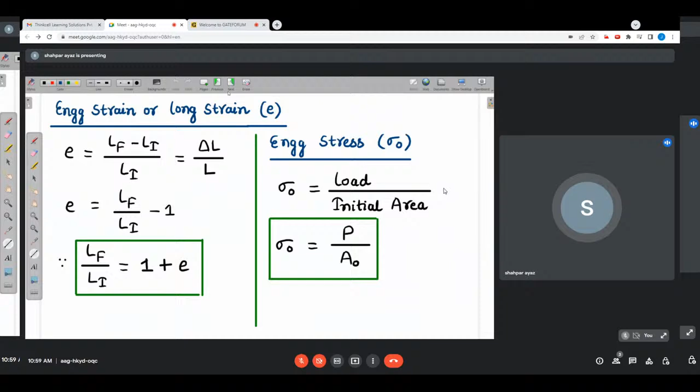So if the L final by L initial is 1 plus E, we can also write it as A initial by A final, or D initial by D final, like this: L final by L initial. This is a very important formula.

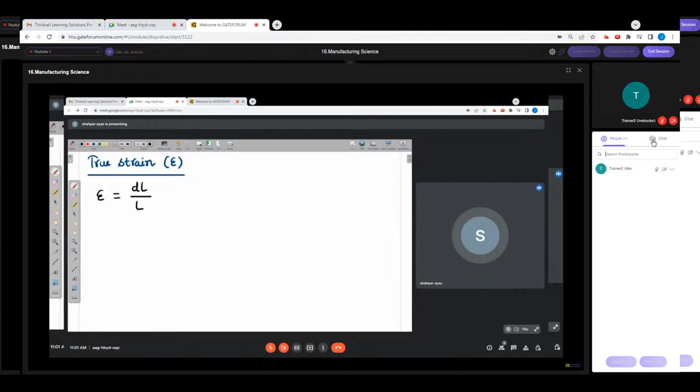If I am talking about the instantaneous change in length upon instantaneous length, that is DL by L. If I want to calculate the total true strain, we need to integrate. This is your instantaneous, and this is your true strain.

Now guys, see, this you can write as d epsilon, because it is the instantaneous true strain. So this is the main formula of the true strain. Once you integrate both sides, you are going to get this result. This is the formula of true strain. Now, one by one, let's understand.

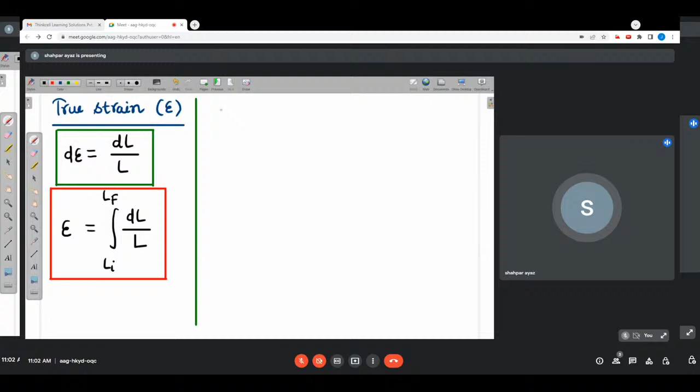If I am going to integrate this, the first formula we get is ln L, integrated from both sides, L initial to L final. We have ln L final by L initial. I'm writing all the formulas for your better understanding. This is very, very important.

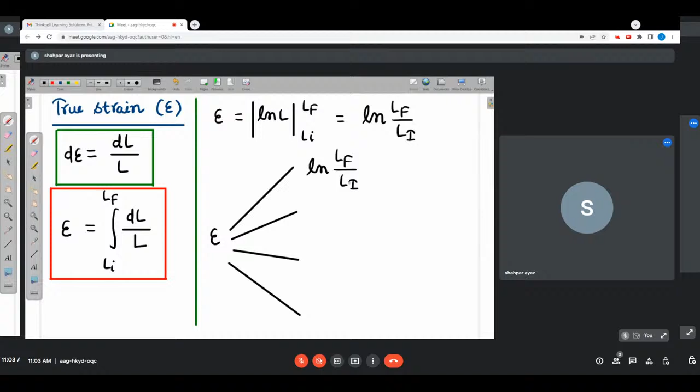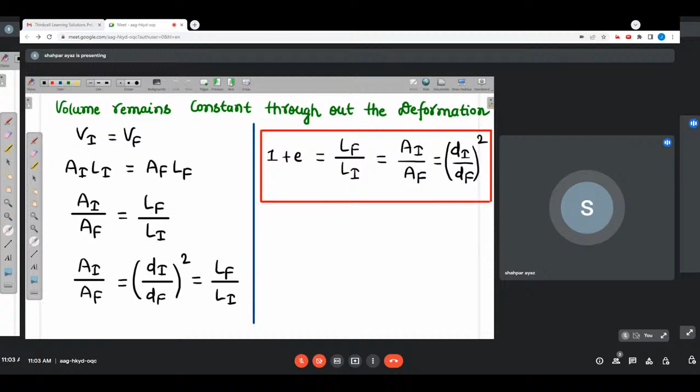The first formula of true strain is ln of L final by L initial. You know very well that L final by L initial equals area initial by area final. So you can write ln of area initial by area final. This becomes 2 ln of diameter initial by diameter final, since it is d initial by d final, the whole square, and the whole square comes in front of the log using basic rules of logarithm.

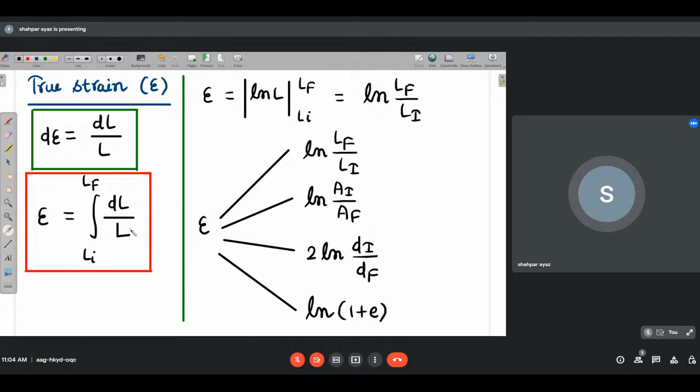And another formula: L final by L initial is 1 plus E, so true strain equals ln of 1 plus E. Whenever length is given, use the first formula to calculate true strain. When area is given, use the second formula; when diameter is given, the third formula; and when engineering strain is given, the fourth formula. As a basic rule, if L is the variable, you can integrate dL by L from L initial to L final. Remember these basic terms.

Clear? This is the true strain. Now, next is your true stress.

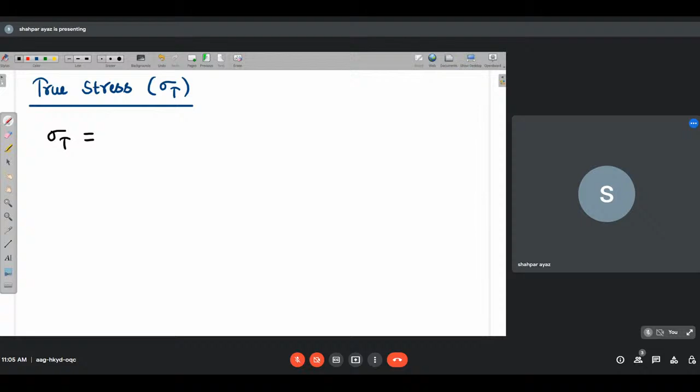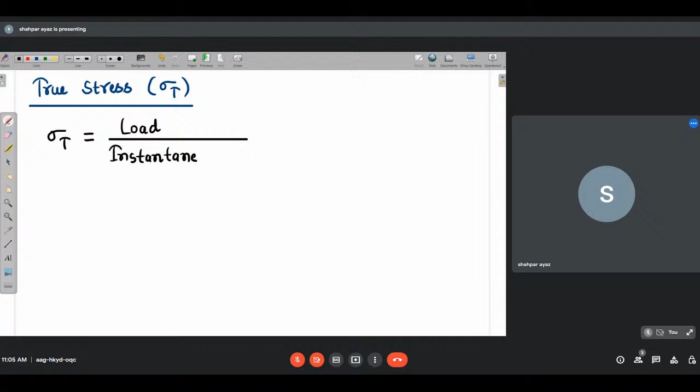True stress is your sigma T. True stress is actually the ratio of load by instantaneous area. Load is your P, and area at any particular instant is A. So true stress equals P by A, where A is your instantaneous area at any particular instant.

Suppose at t equals 5 seconds, you see the deformation. Because whenever you apply the load, the area is getting decreased. At a particular instant, what area do we use? Now there is one formula that we derive. In the mathematics, true stress equals P by area.

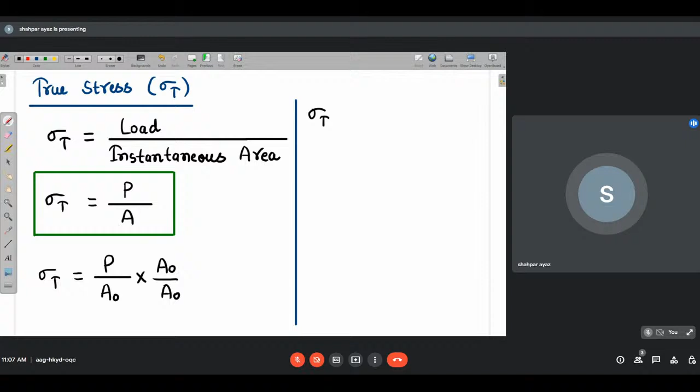This I am going to multiply by A naught into A naught by A. So we can call P by A naught as sigma naught. And A naught by A, what do we call A naught by A? That's quite simple, let me write it.

If we apply the conservation of volume, we know volume is conserved. So initial volume V naught equals the volume at any particular instant, because initially area is A naught, length is L naught. Once you apply load, the length increases and the diameter decreases, so the volume remains constant. So A naught L naught equals A into L, and we can write A naught by A as L by L naught.

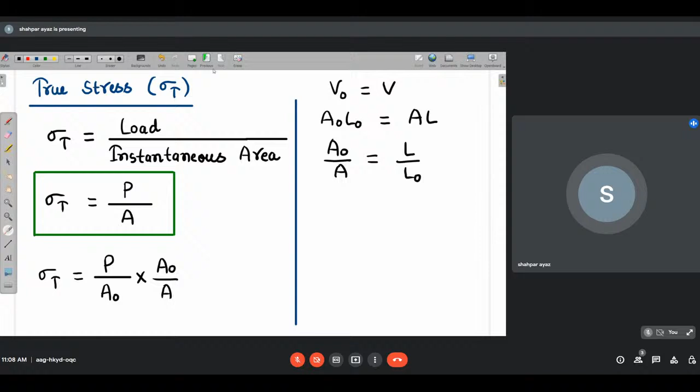So A naught by A equals L by L naught, meaning instantaneous length upon initial length. This ratio, initial area by instantaneous area, equals final instantaneous length upon initial length, which is 1 plus engineering strain at that instantaneous point. So 1 plus E we can equate with this.

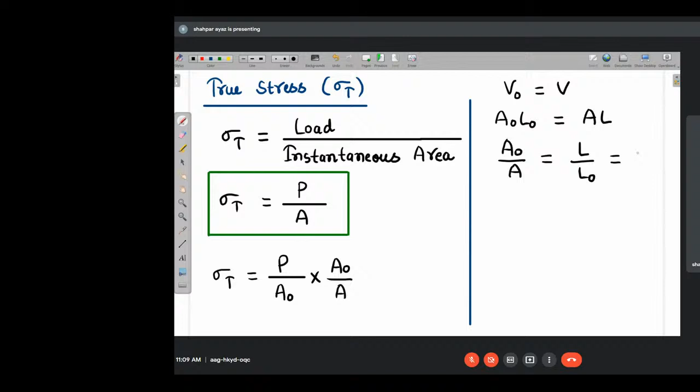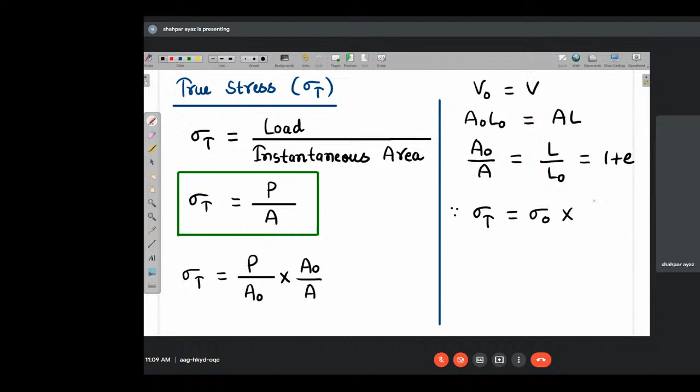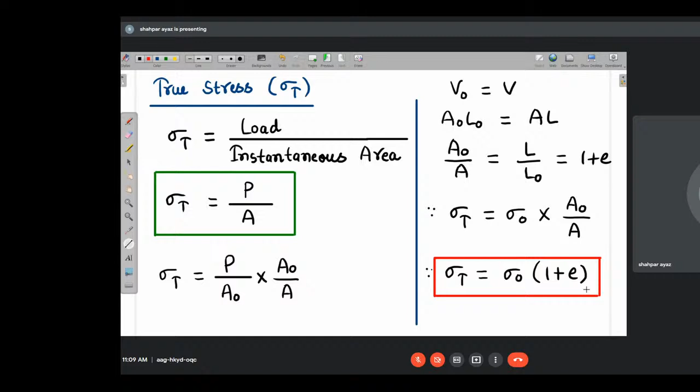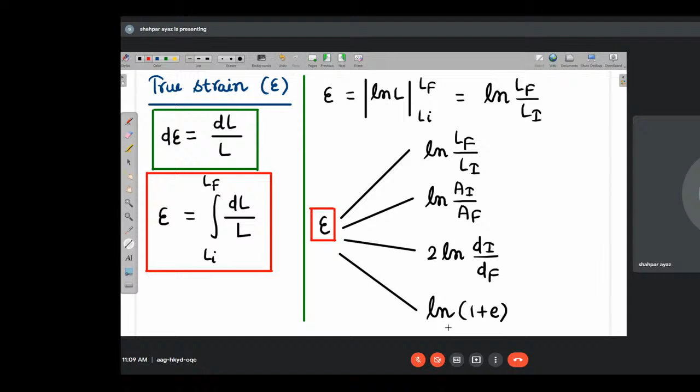Therefore, true stress equals P by A, where P by A naught is nothing but engineering stress, sigma naught, multiplied by A naught by A. So true stress equals sigma naught into 1 plus E. These are the formulas you need to remember: the true strain formula ln(1 plus E), the true stress formula sigma naught into 1 plus E, and sigma naught is your P by A naught.

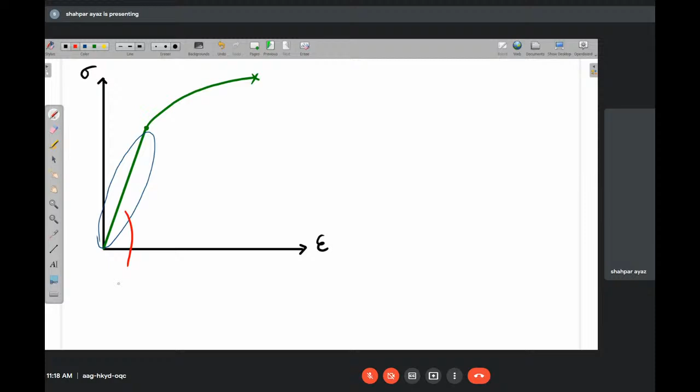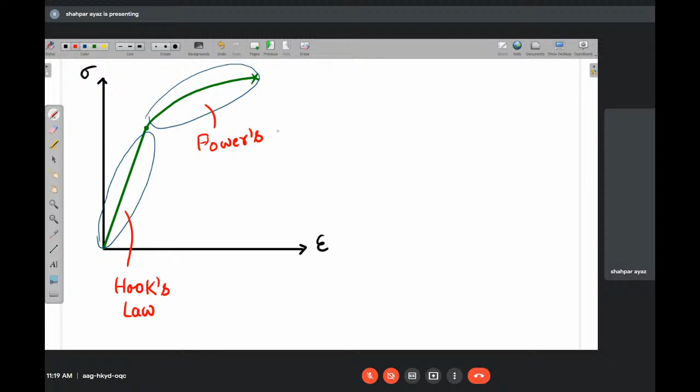And this is your plastic region. It follows a strain hardening law, Power's law of strain hardening.

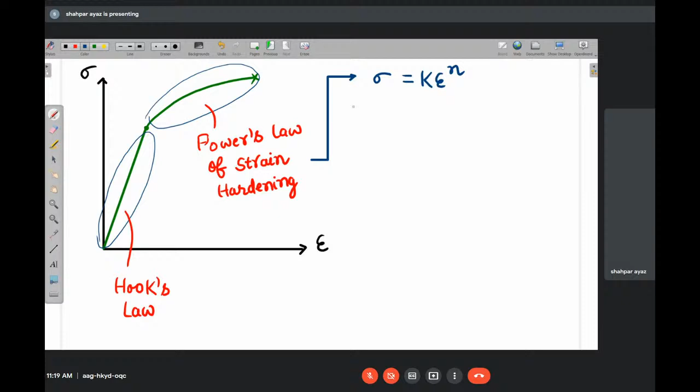What is this law? Let's understand. The law states that sigma equals k epsilon to the power n, where sigma is true stress, epsilon is true strain, k is the strain hardening coefficient, and n is the strain hardening exponent.

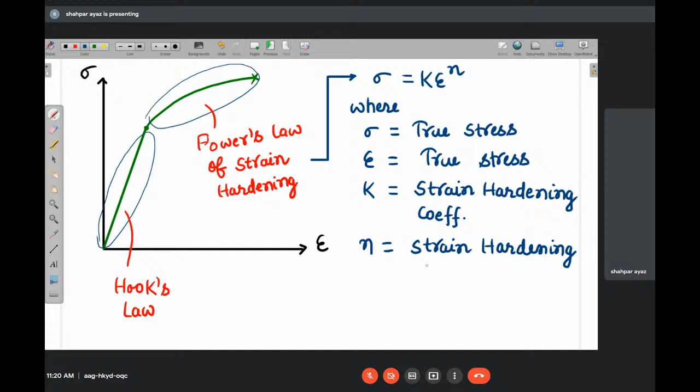The unit of true stress is megapascal, and the unit of K is also megapascal. True strain has no units.

Now guys, I'm showing you some graphs. If you draw a line like this, a horizontal line means there is no strain hardening. The value of small n is 0. But in this case, strain hardening increases like this. So here the value of n in Power's law, when n equals 0, sigma equals k. The value at this point is equal to k because n is 0. Always remember, in the plastic deformation region, a horizontal line means n is 0, and here n is greater than 0.

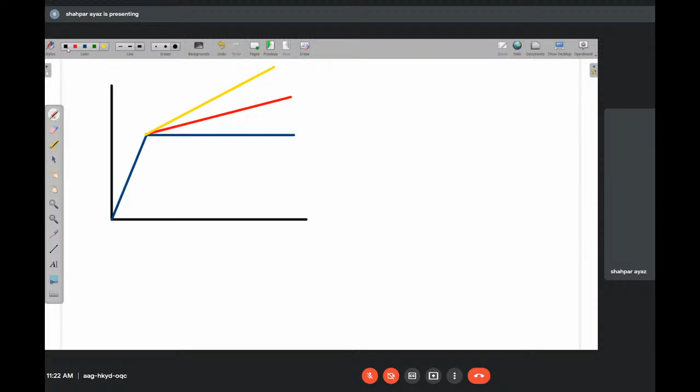The value of n actually lies between 0 to 1. Let me show you one more example. If the graph is like this, another graph is slightly increasing, and another is more increasing. Here n equals 0, here n equals 0.2, here n equals 0.3. The more the slope, the more the strain hardening. Remember that.

So guys, this is one problem asked in GATE 2020. For a perfectly elastic material, what is the value of strain hardening? For a perfectly plastic material, what is the value of small n? Tell me in the chat box, everyone.

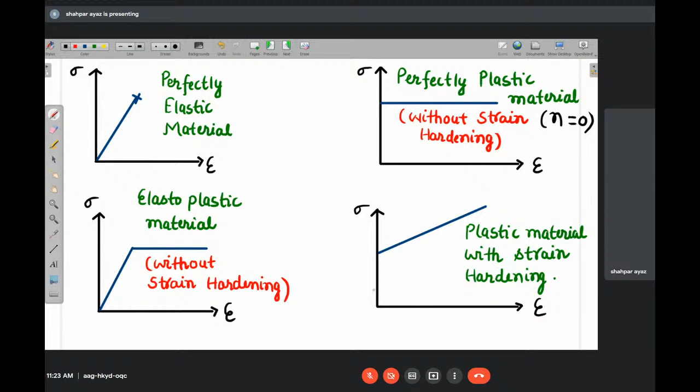Mukul Manpure, Ansar, Naveen - for a perfectly plastic material, what is the value of strain hardening exponent n? This is n equals 0. And for a plastic material with strain hardening, n is greater than 0. Remember these results.

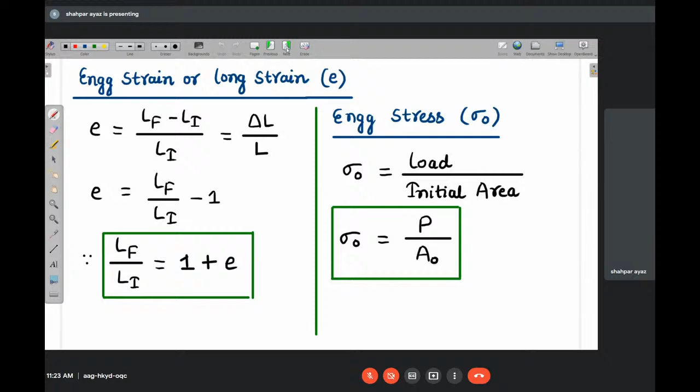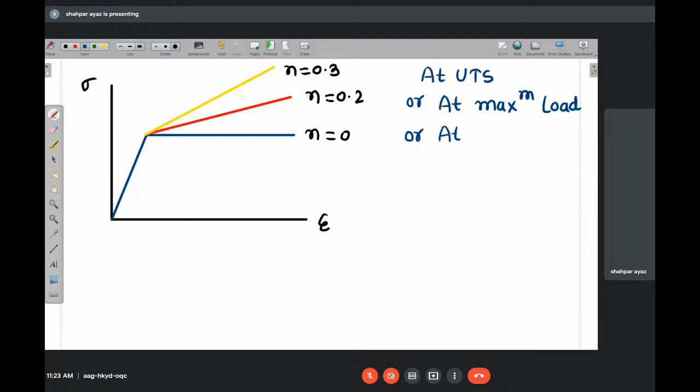Now one more point - remember that at UTS, the ultimate tensile point, it is also called at maximum load, because at the ultimate point the load is maximum. And also at necking, because necking starts from UTS. So at maximum load, at the ultimate point - whenever these points are mentioned: at maximum load, at UTS, at necking - remember this.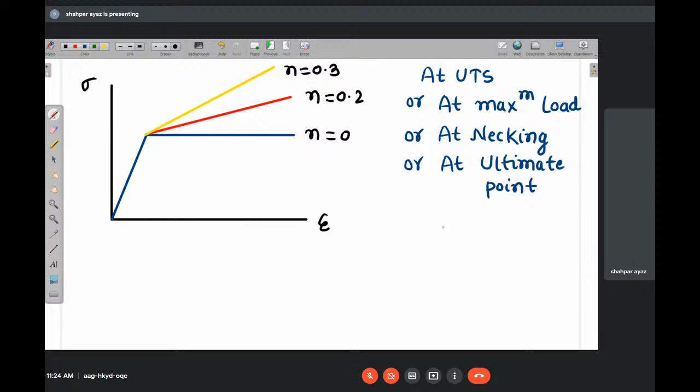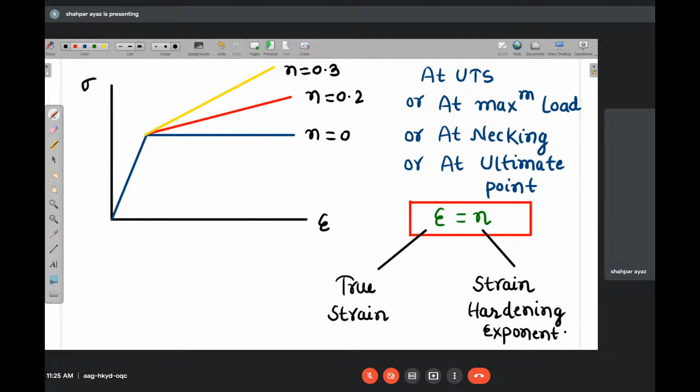I'm not going into the derivation, but at this point the true strain is equal to the strain hardening exponent, small n. True strain equals the strain hardening exponent. Remember that. This is an important result - note it down.

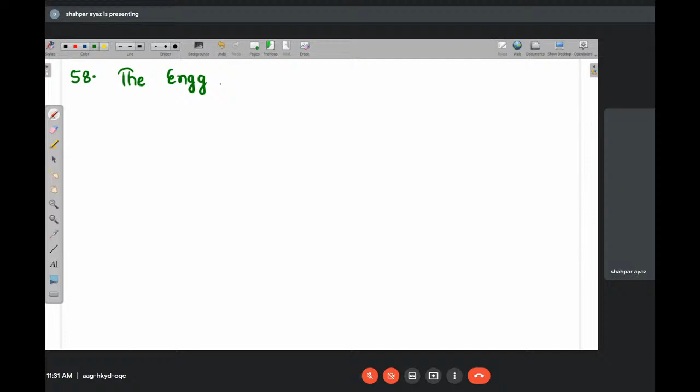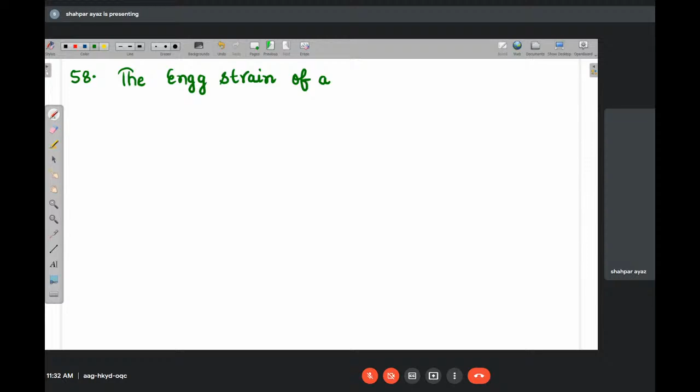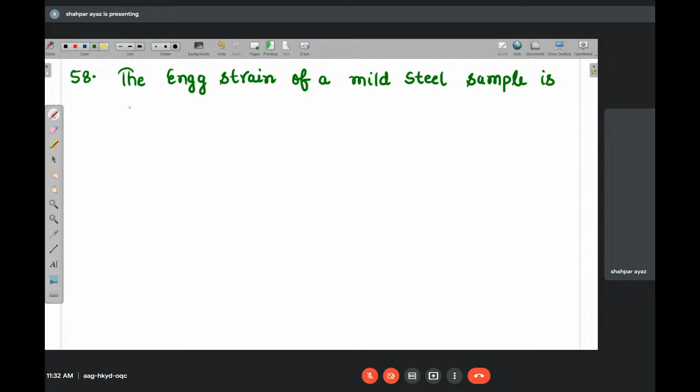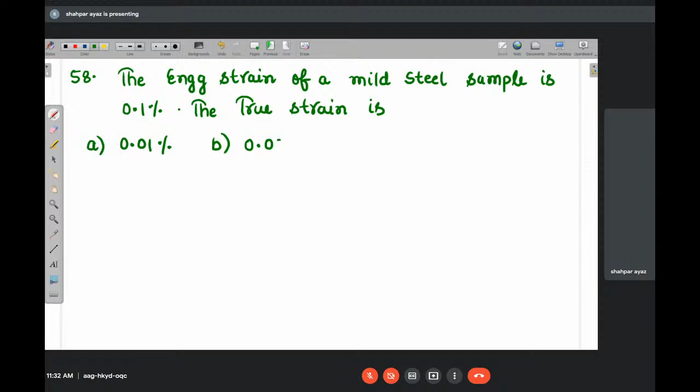Now, first problem. The engineering strain of the sample is 0.1%, 1%. Find out, everyone. What is given is engineering strain of 0.1%, which is 0.001.

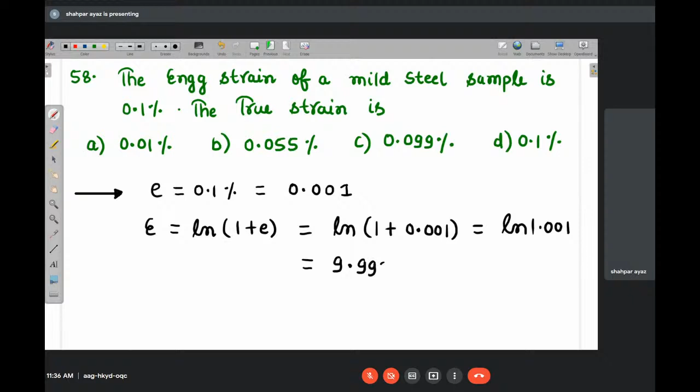So true strain we know very well, that is ln(1+e). What are we getting, everyone? We get 9.99 times 10 to the minus 4. But in percentage, if we convert it, multiplying by 100, this is 0.0999. The right answer is C.

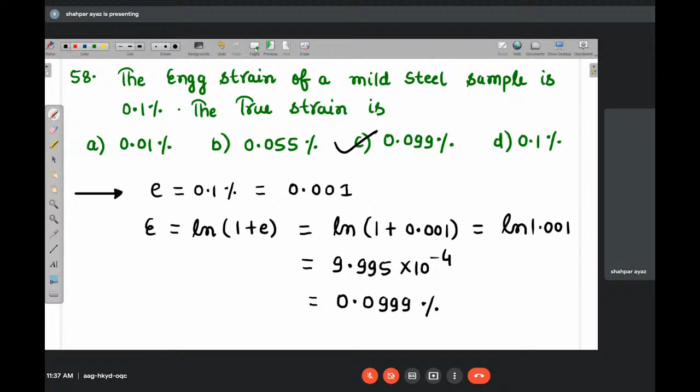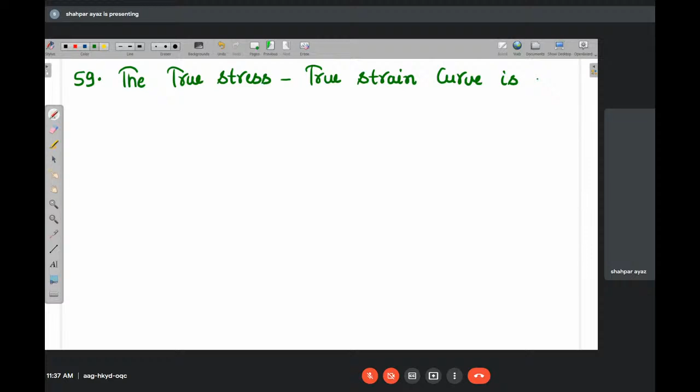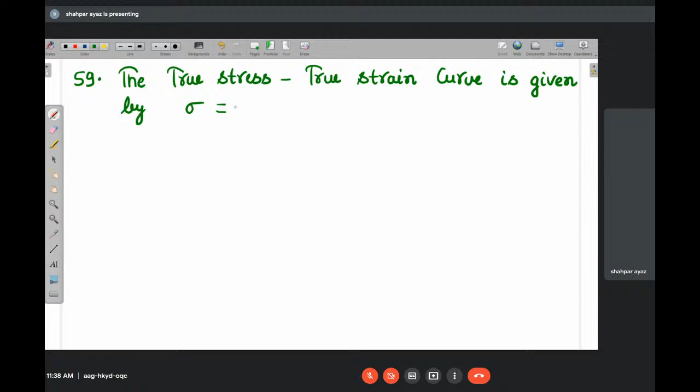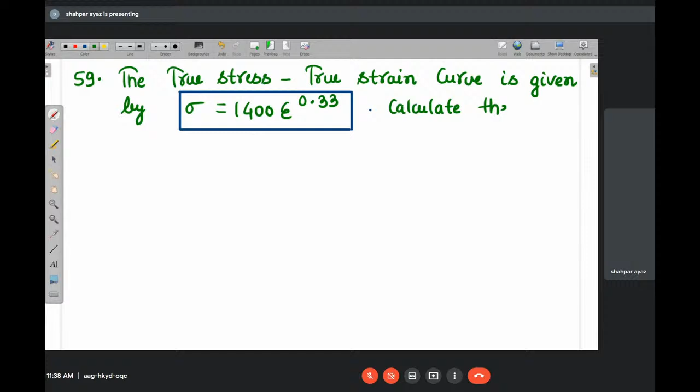Next question, guys, number 59. The true stress versus true strain curve is given. Calculate the true stress at maximum load. Find out everyone, and tell me fast - what is the right answer for this problem?

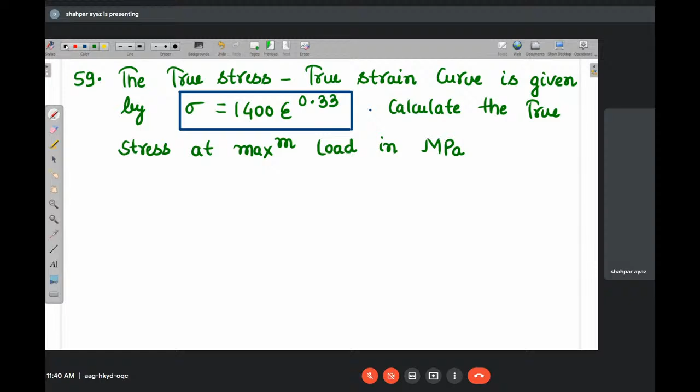Quite simple, we know very well. Power's law is given to us: sigma equals 1400 epsilon to the power 0.33. Comparing with the main equation, n equals 0.33. At maximum load, we know true strain equals small n. So true strain equals 0.33 at maximum load.

So now we need to find the true stress using the formula: sigma equals 1400 times 0.33 to the power 0.33. We get 971 megapascal. Clear, everyone? This is the true stress at maximum load, because I already taught you - at maximum load, true strain equals n. Note that down, all of you.

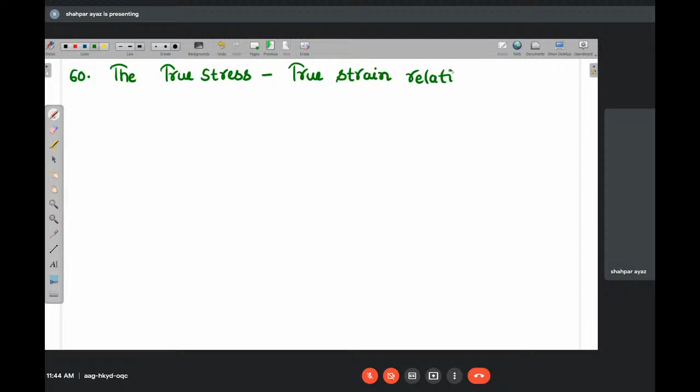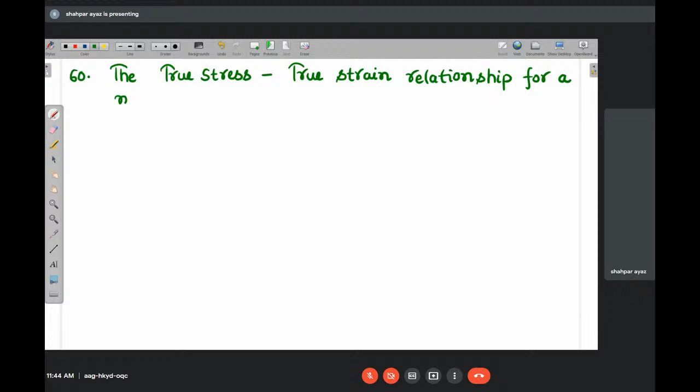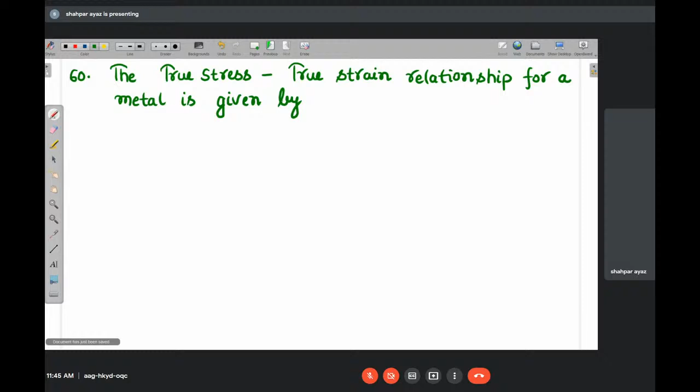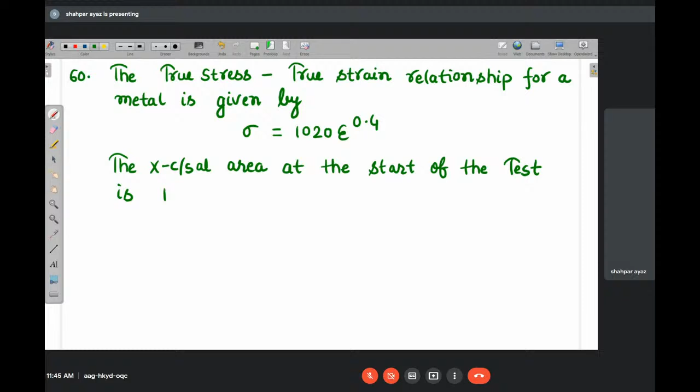The true stress relationship for a metal is given by sigma equals 1020 epsilon to the power 0.4... The cross sectional area at the start of the test is 100 mm square. The cross sectional area at the time of necking is dash mm square. Try it, everyone.

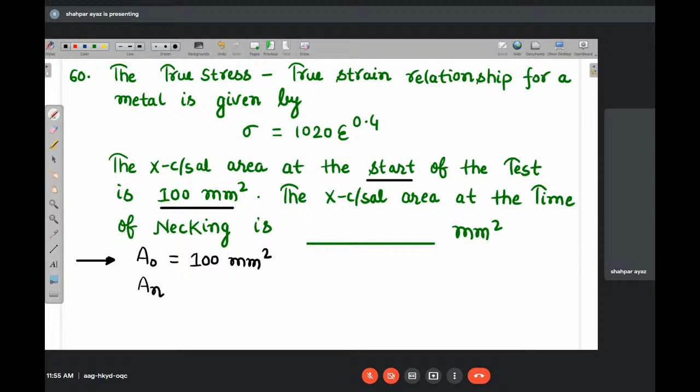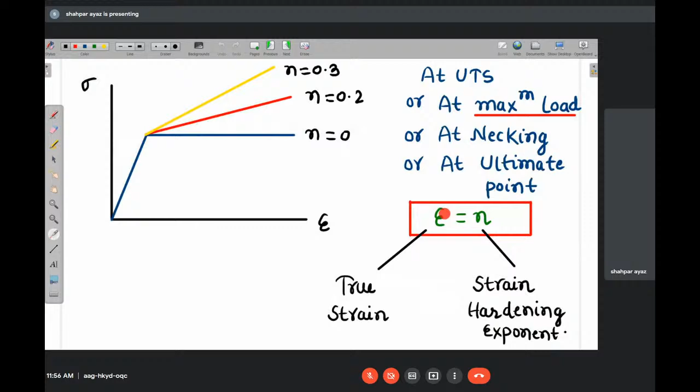That's quite simple. See, at necking, when necking begins, true strain is equals to N. So here in this problem, N is 0.4, meaning true strain is also 0.4. True strain is Ln of area initial (A naught) over final area at necking (An), is equals to 0.4, meaning A naught by An is equals to e to the power 0.4.

E to the power 0.4 is what? E to the power 0.4, we are getting 1.49. So here An is A naught by that value, A naught is 100, 100 by 1.49 means 1.5. So approximately what we are getting, everyone, is 67.03. Is that clear?

Is this clear, everyone? That is the cross-sectional area at the time of necking. I hope this is perfect.

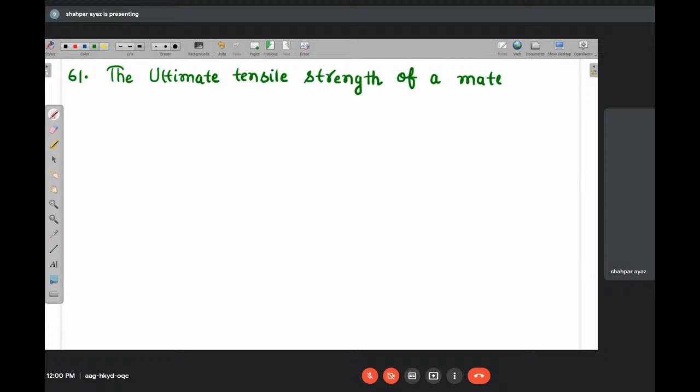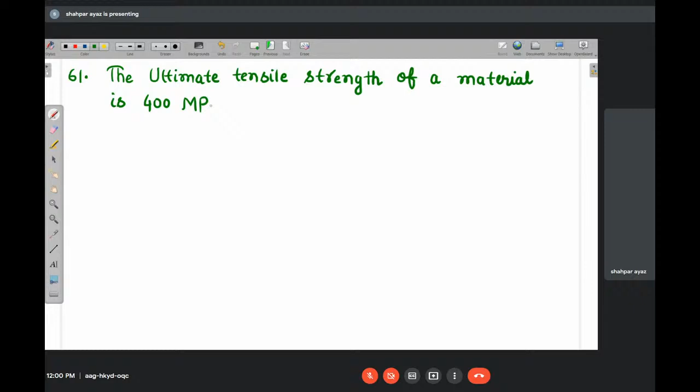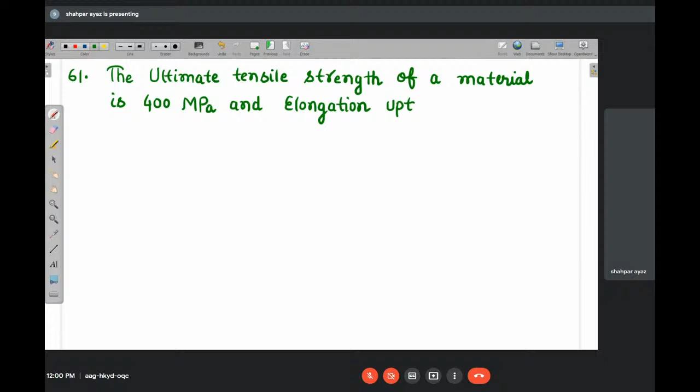Answer. See, the ultimate tensile strength of a material is 400 megapascal. And elongation up to maximum load is 35%.

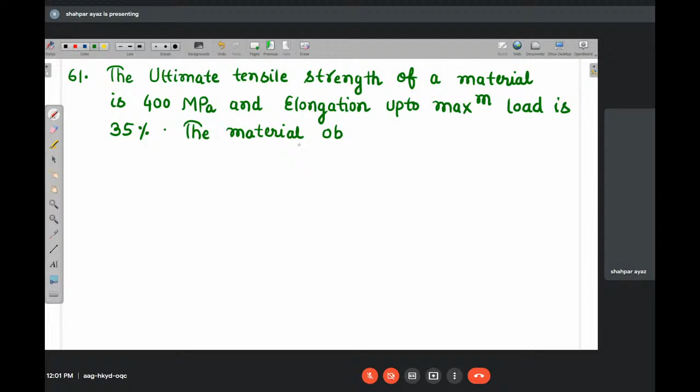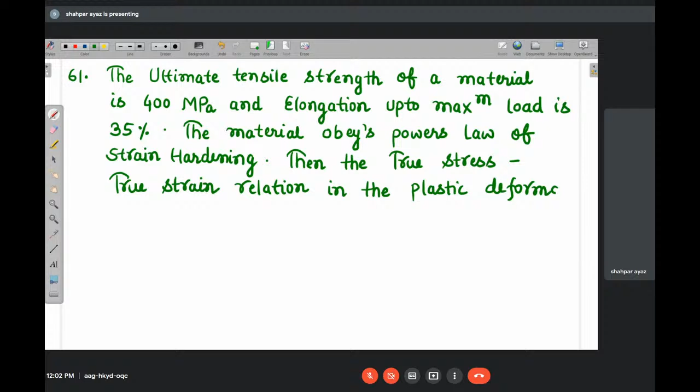The material obeys power law of strain hardening, giving the true stress true strain relation in the plastic region. Find the correct true stress true strain relation. Epsilon 0.30.

This is the right answer, everyone. Do it.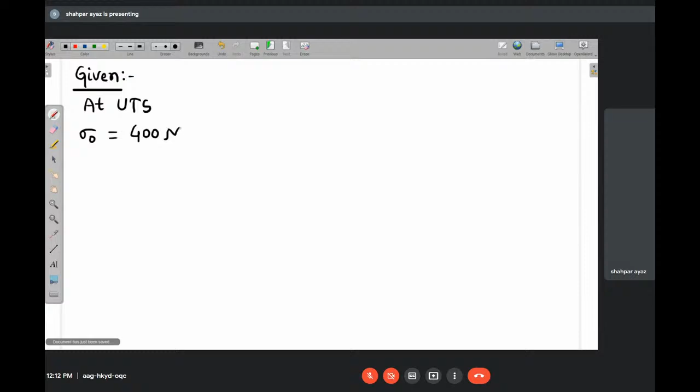The ultimate tensile strength of the material is 400 megapascal. Ultimate tensile strength means sigma naught is given; tensile ultimate means at UTS the value is given. The values are given at UTS. Sigma naught is 400. And engineering strain is 35%, that is 0.35.

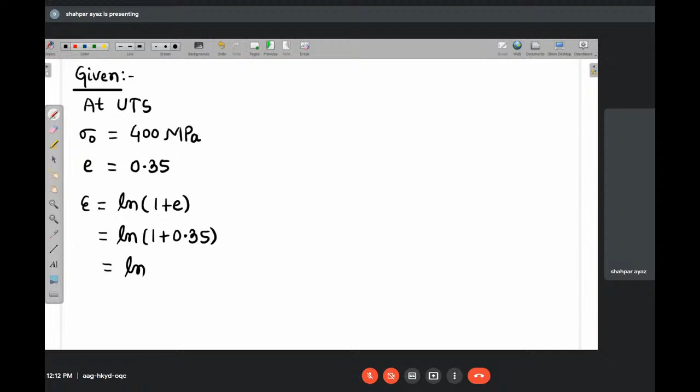Now guys, the material obeys the Power's law of strain hardening, so at UTS we can find out the other values like ln(1+E), that is the true strain at this point. ln(1+0.35) equals ln(1.35). So true strain we are getting 0.30, correct?

This is your true strain, my dear. Now calculate the true stress. True stress is sigma naught into (1+E): 400 into 1.35. This we are getting 540.

Now some students are getting confused. Once they get the value true stress 540 and 0.3, they just tick answer A. But in the problem, they don't ask you true stress and true strain; they ask you to find out K and N. To get this value, we will use Power's law here.

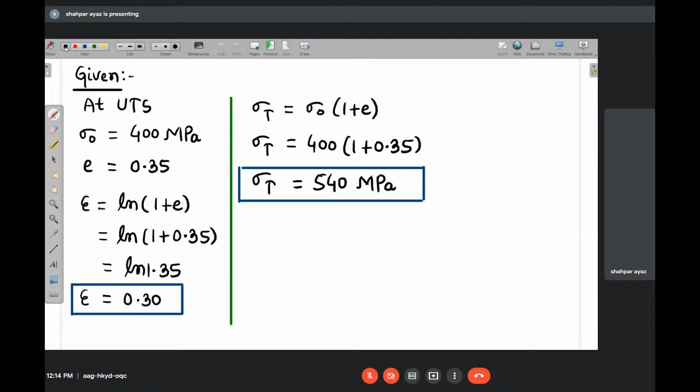Power's law we know: sigma is equals to K epsilon to the power N. And since we are using at UTS, we know very well that at UTS your true strain value equals N, meaning N is equals to 0.30. You can also eliminate some options: N is 0.30 means options B and D are wrong because there the value of N is 0.33, which is wrong. Either A or C is the right answer.

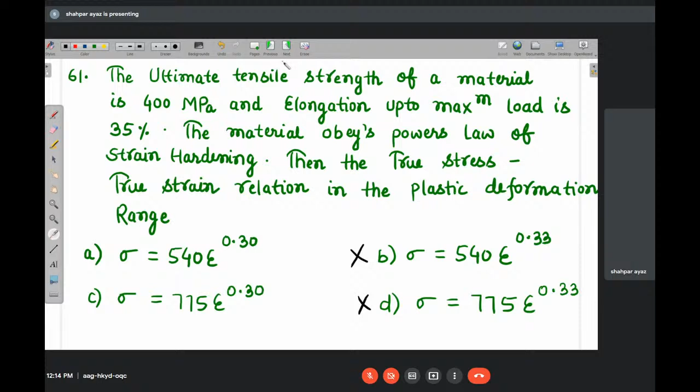Now, so when we put the value, because at UTS we know true stress is 540, K into 0.3 to the power N. What is the value of K we are getting, all of you? 774.92, approximately, so K as 775. Meaning the final equation is sigma is equals to 775 epsilon to the power 0.30. Correct, everyone?

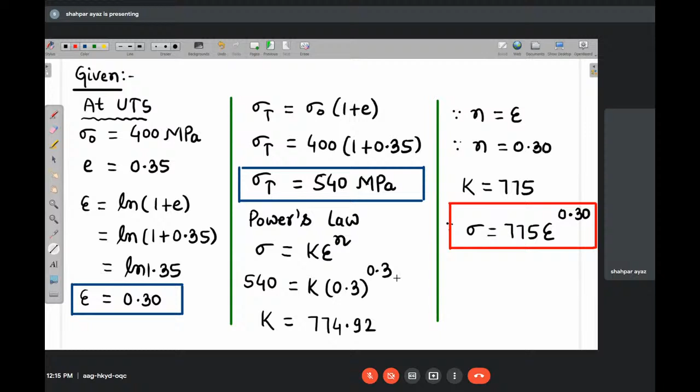Is that okay, guys? Is that okay, guys? Clear, everyone? Good.